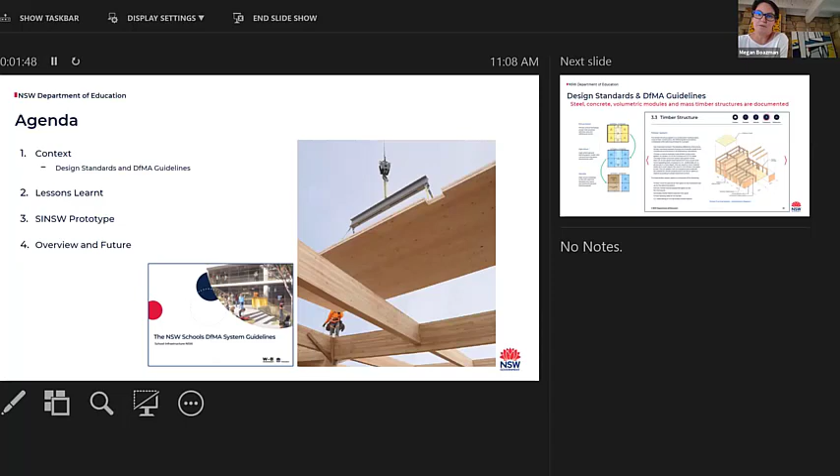And Ian Lomas from Woods Bagot will talk through in more detail about what these guidelines actually have in them. And this morning we'll talk about some of our lessons learned through that process. And Adam will also talk you through the school infrastructure prototype that we're going to be doing this first half of the year, and also give you a bit of an overview of what we think the future looks like for timber, particularly in DfMA.

So within the guidelines, we have actually, as I said, talked about these design standards, and we took the approach that this can work for steel, concrete, volumetric modules or timber structures. It's not actually precluded to any one particular construction methodology. The importance for us was to ensure that we had schools designed so that they could be interchangeable between primary schools and high schools as enrolment waxes and wanes, which is typically what happens over the 60-year lifespan of a school or longer.

So the guidelines are there to actually explain how you can apply any sort of structural systems, but it was really important that we made sure that from a perspective of enabling the timber industry and mass timber, we had a structural grid of 9 by 7.5, which suited all structural systems, but particularly works well for timber as well. So in terms of working out whether it's primary and secondary beams, we've had floor-to-floor heights and all our analysis done by TTW, which did a really good job on this. And there's a lot of detail in this document that actually shows how you apply this.

The intention and purpose is that we have an open source of procurement to some extent, so that it's a benchmark for all designers, architects, engineers, and everyone in the industry to be able to understand how we're thinking about the ability to put schools together for students, and therefore everyone understands the knowledge that goes into it and can apply it quite readily.

Some of the key benefits, and I think you're probably all aware of this with timber buildings, but particularly for education, some of the benefits around health for students are that you get a lower resting heart rate. There's been a lot of research to indicate that the connection with nature, biophilic design, actually helps in terms of ADHD and other sort of behavioural issues.

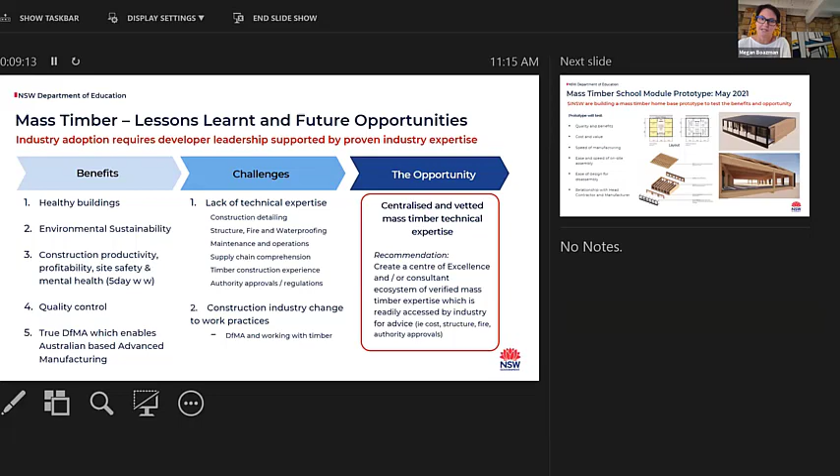I'll pass on now to Adam Taylor to talk about the prototype School Infrastructure is developing. Yeah, thanks, Megan. As noted, Adam Taylor is my name. I'm Director of the DfMA program within School Infrastructure. So Meg touched on some of the benefits there.

So within School Infrastructure in New South Wales, we've got a bit of a challenge ahead of us in providing infrastructure for very much an enrolment boom within public education. As Megan mentioned, we developed the DfMA guidelines and circulated them to industry late last year in December. I'm sure there's an opportunity that we can share that link via Andrew following this session. Ian from Woods Bagot is going to talk through them in a little bit more detail later.

But for us, the prototype really allows School Infrastructure to bring that guideline document to life. That guideline really starts to open the door for more efficient design and construction methodology, which obviously timber falls into that category. So Fern Bay, for those that don't know, is located up in the Newcastle area of New South Wales in Australia. It's a school that has that rapid growth and they're experiencing that at the moment.

What the timber prototype does is allow us to look at different ways we can meet the infrastructure needs of that school that would traditionally be met by our demountable program. So it's really something that we're quite interested in, as to how this could grow in the future and potentially be a wider program. At the moment we're currently working up the design stage. We're very close to releasing the tender for a head contractor.

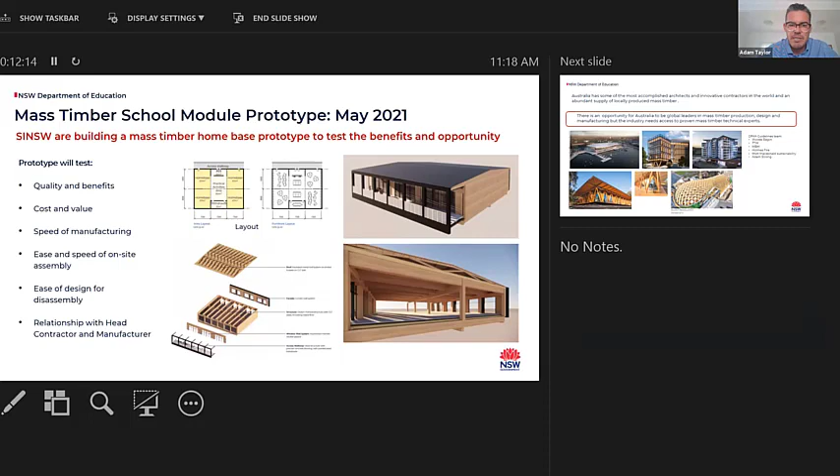Thanks, Adam. So really, overarchingly, there is a desire to see mass timber buildings become the norm, business as usual in Australia. There are so many benefits to it, and of course it plays into the initiative and strategic objectives around advanced manufacturing, particularly in Australia. We have some very, very talented architects, probably the most talented architects in the world, and I can say that from having worked globally. And I think that we need to support that a lot more.

And we have an abundant supply of local mass timber product, which we should be using rather than importing it. So from our perspective, we see it as an opportunity for Australia to become truly a global leader in applying mass timber, be it in hybrid structures or as pure timber buildings, particularly in New South Wales. The whole mass timber production, design and manufacturing needs to be invested in and supported. And we think there's a real opportunity, ironically, in this COVID environment to do that.

But the industry needs to be able to access proven technical mass timber experience and expertise. And that's where I see the opportunity being, as to how we might actually enable that to happen more broadly, for everyone to get access to that advice and that expertise. The DfMA guidelines that were put together with School Infrastructure had a really good team.

As I said, we had to swap that through halfway, two-thirds of the way through it, but we had Woods Bagot on architecture, TTW on structure, MBM doing all our cost planning, Holmes Fire, we had James O'Neill advising us on that, we had Mott MacDonald advising us on sustainability, and we had Adam Strong bringing his mass timber manufacturing experience and more of a builder's perspective to it.

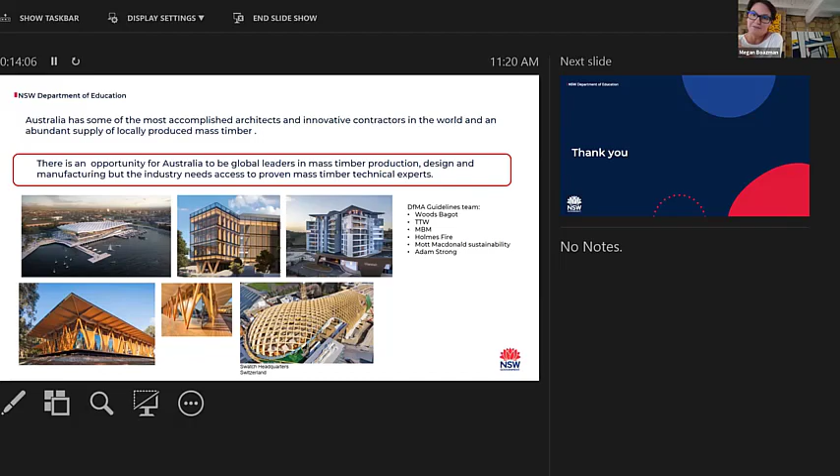And I want to reiterate Megan's discussion there about the team and the ability for us to challenge each other, and also to rethink the way that we look at and procure and design buildings. So what I'm planning to do is to use the DfMA guidelines as a basis for the talk today. It's all going to be out of sequence because it's an interactive PDF, but talk you through some of the principles, some of the challenges we've been looking at, and some of the opportunities.

So when we look at the DfMA in the schools, we found it was very important to set out what our principles are so that we don't end up going down a rabbit hole. Now, these are schools, so pedagogy is always first and foremost, and that has to be the basis of everything we do. And by looking at what is the best teaching outcome now and in the future, we can also look at equity across the schools with consistency.

Now, there's a resistance that says if you do consistent, it's all going to look the same, it's all going to be reductive and boring. I think we have to look at it another way, in the way that we can deliver the same level of quality of space and environment across the state of New South Wales. And within there, looking at how we can prioritize resilience and wellness.

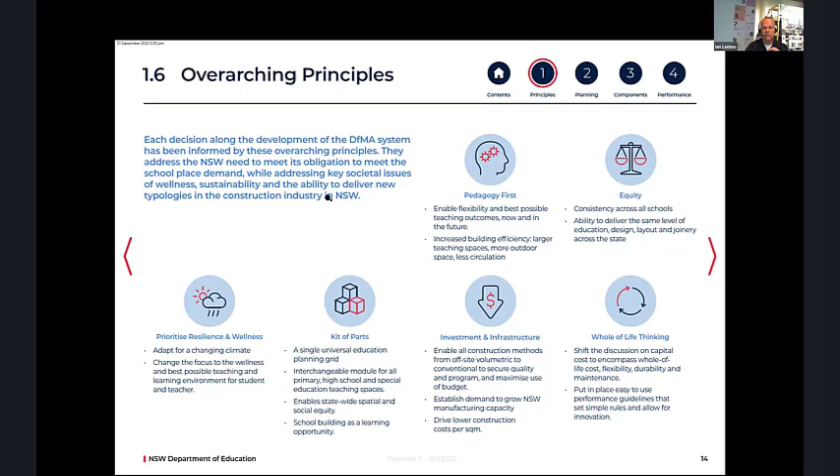Just a minute, I'm having the problems now.

Kit of parts or volumetric, we do not discriminate against different systems. And when we were looking at DfMA, one of the things which probably posed the biggest challenge, but also the biggest benefit, was how can we eliminate wet trades from site and make something that is truly modular and can be easily dismounted and reassembled without being destructive.

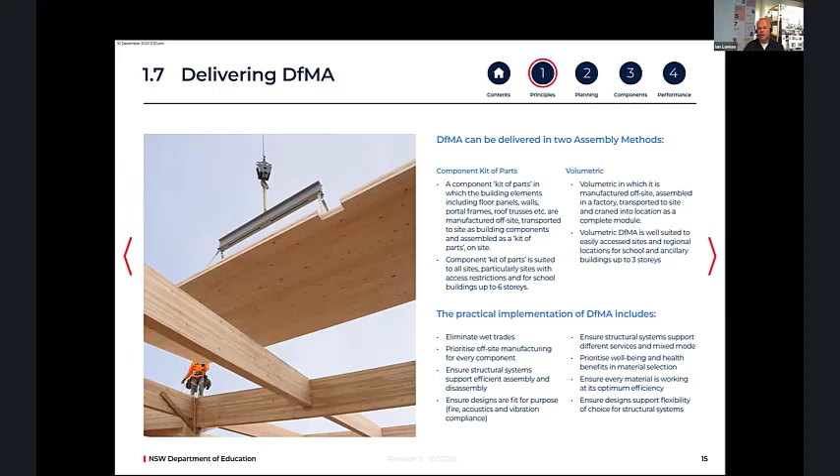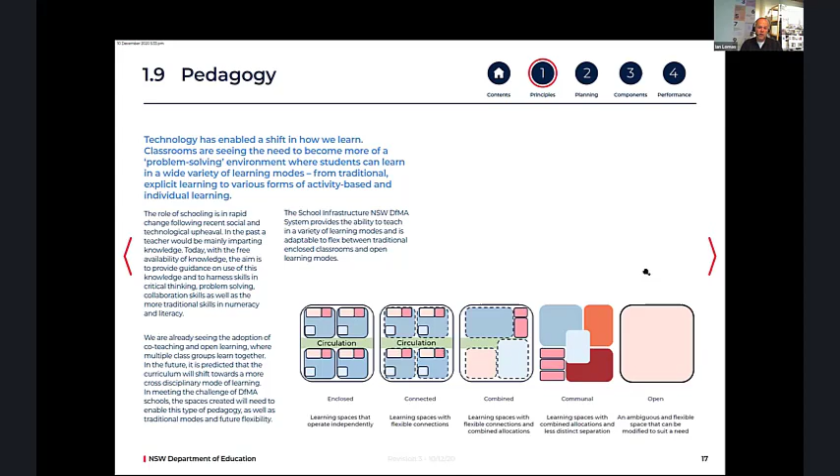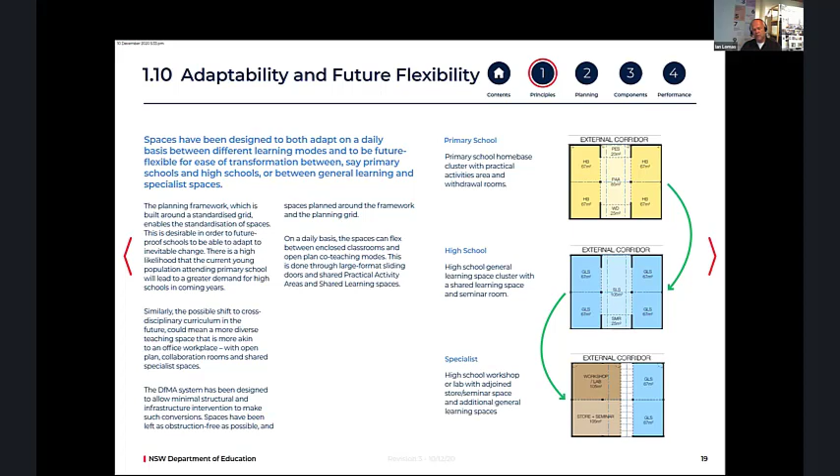Pedagogy changes all the time and will keep on changing, and it's never just one model. So how can we produce something that can evolve? And that means maybe looking differently at the way we design classrooms. Even within a school, changing demographics, you might start by designing a primary school, it might become a high school, or it might become a specialist space. Too often we're building buildings that can't be updated, and then they're just left or they're demolished, which also speaks to the waste of materials, the time, and the money.

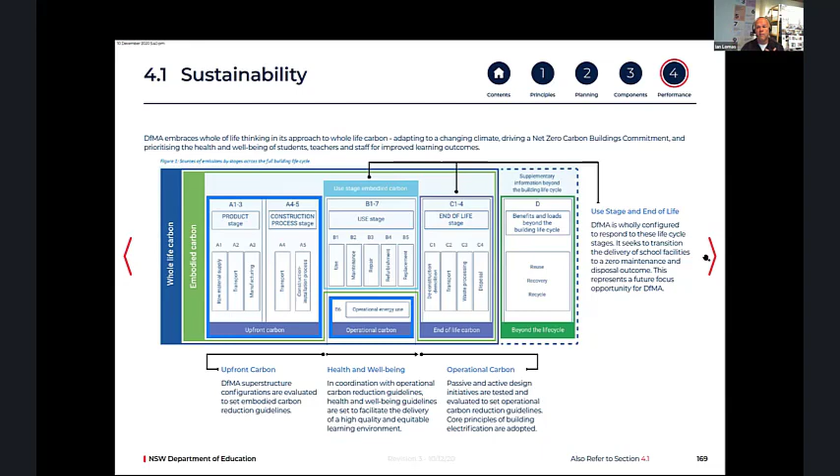And on sustainability, this is something working with Mott MacDonald that we were able to analyze critically: upfront carbon, health and well-being, operational carbon, use stage and end of life, all of these together. Very often, as we all know, projects are looked at the front end, or what you get at the beginning. But with schools, we're able to take a much longer view over the whole life and multi-generational qualities of the building and where the real benefits lie.

And looking at different structural systems, it's very simplistic to go, timber is all good, and timber, we all love it. But there will be hybrids. There will be different settings where, due to the local workforce, due to the local settings, other materials or hybrids would come forward. But we've always got to be able to analyze this.

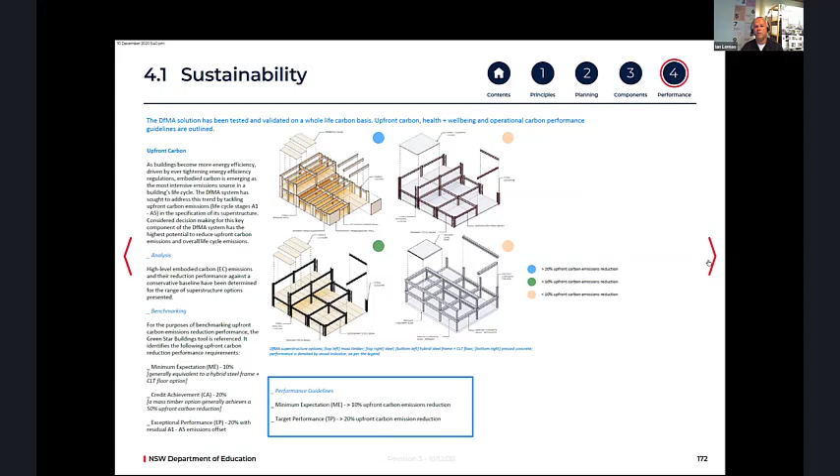On the upfront carbon, timber wins instantly, but we need to be able to grow a timber industry here rather than having to import it from the other side of the world. And climate resilience: we looked at every single climatic condition in New South Wales. We looked at daylight access, visual comfort, thermal comfort, views, interrogating all of the grids, all of the layouts, all of the facade zones to come up with an approach, a guideline of how this can be looked at.

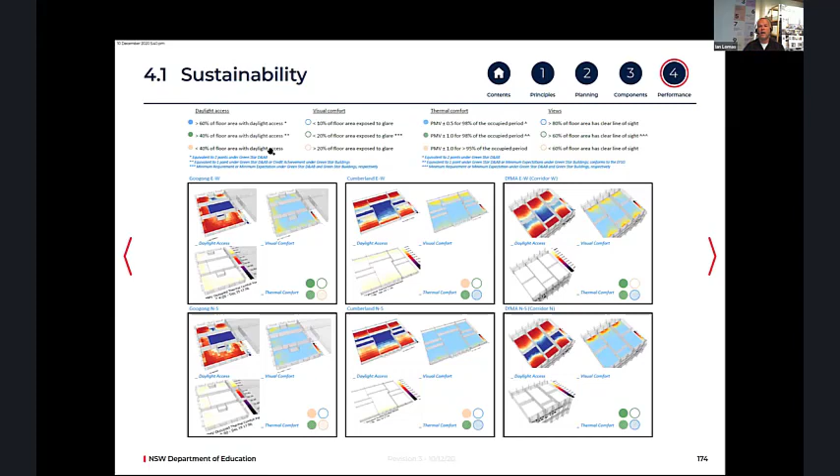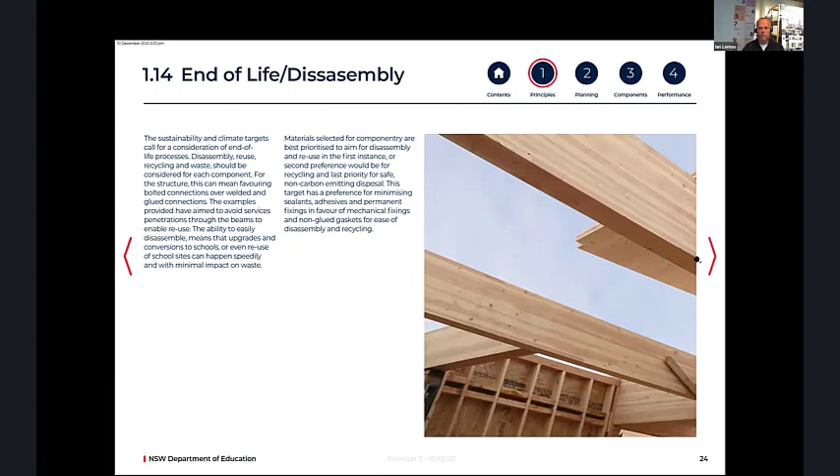And then at the end of its life, how it can be disassembled, reassembled and reused, again using the same components. So what are those components? They are the core here, and I'm using timber as our core base structure. Right in the middle, timber structure. Then we feed in there our partitions, our internals, which define the spaces, define the uses, and these can be taken out and moved so they do not prescribe the structure.

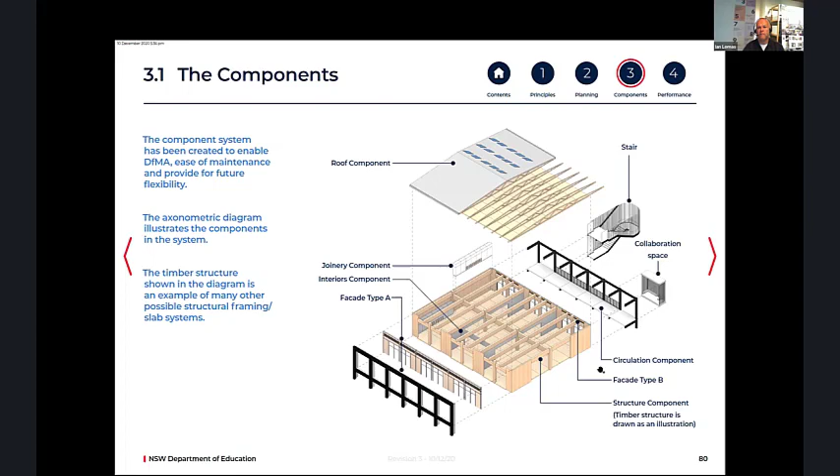Outside, we have facades maximizing daylight, maximizing views out, and the facades will obviously vary according to orientation, location, context. The roof, often overlooked, is also a key element. Are we going to build up? Are we going to use it for energy generation? And then the circulation, which comes on one side: collaboration areas, gardens, stairs, lifts, all of that plugs in together.

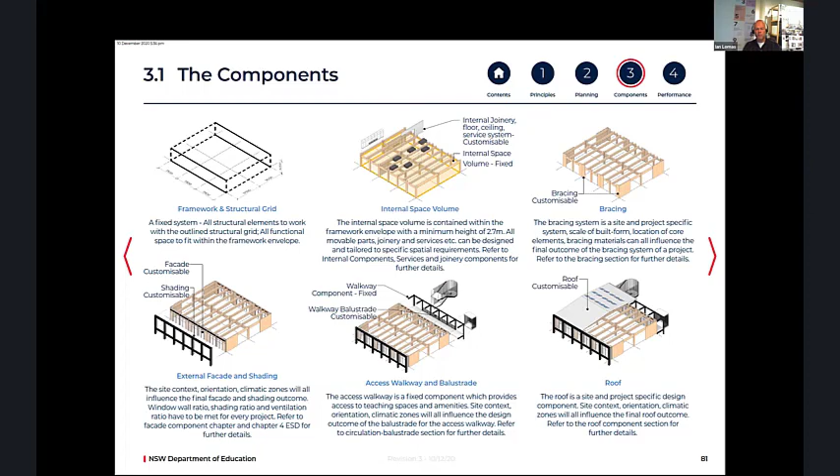So I'm just going to take you quickly through the thinking here. Framework. What is that structural grid? What is the internal spacing? How do we brace? What's the facade? How do we plug in? And what happens on the roof? Now, our framework, we had a lot of modules here. So we almost see this like a 9-meter train track. This can be one 9-meter or it could be two. The two allows larger classrooms. A single one allows it to be fitted in.

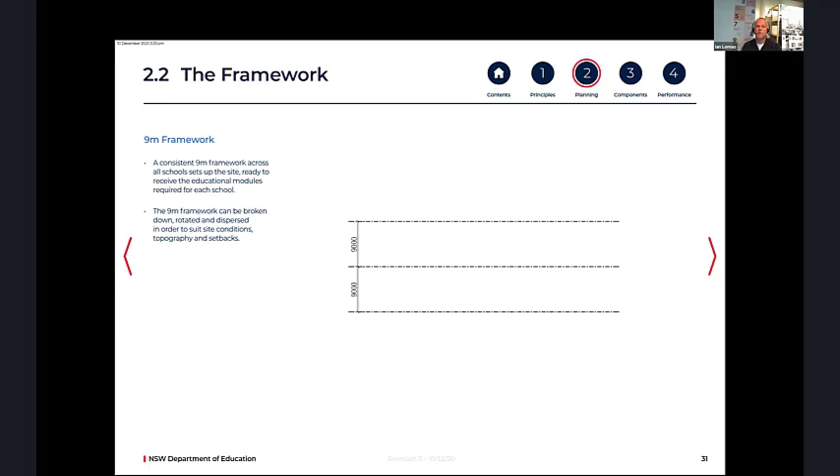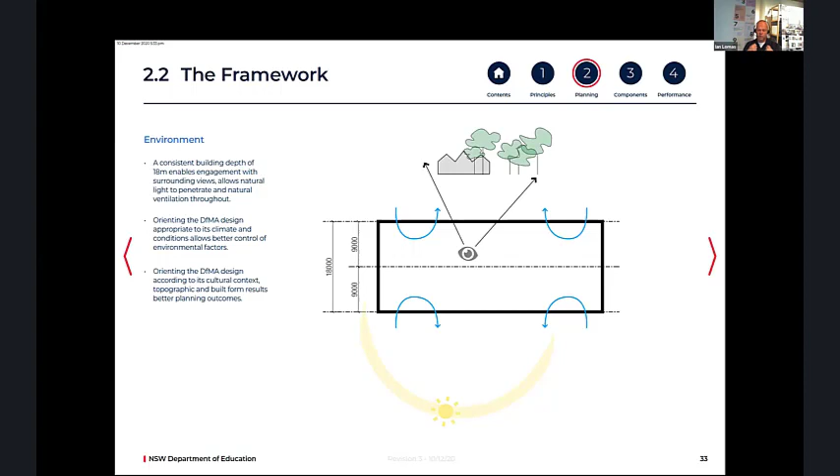Then we look at the facade, and we're really creating our chassis, our envelope that can then take all types of classrooms. We've got to look at the context, the orientation, where the sun is coming from, where the wind is. Too many school projects, or all projects to be honest, we design in isolation and then just put them around the site. This is trying to put forward strategies that look at the site first and create the best internal environment.

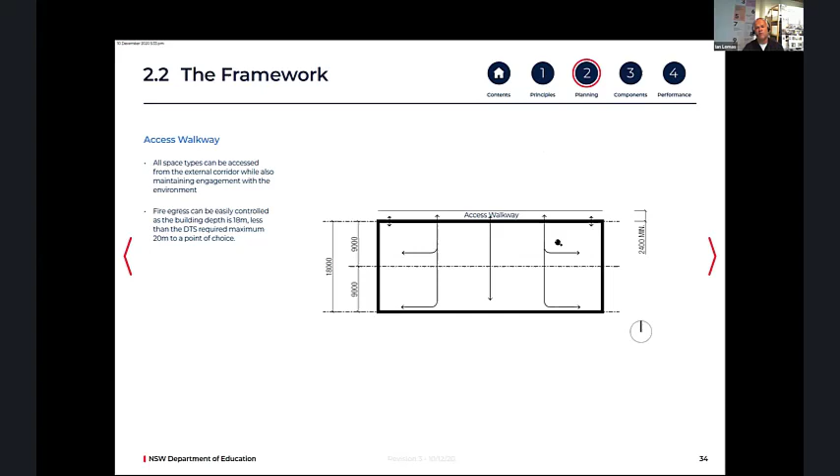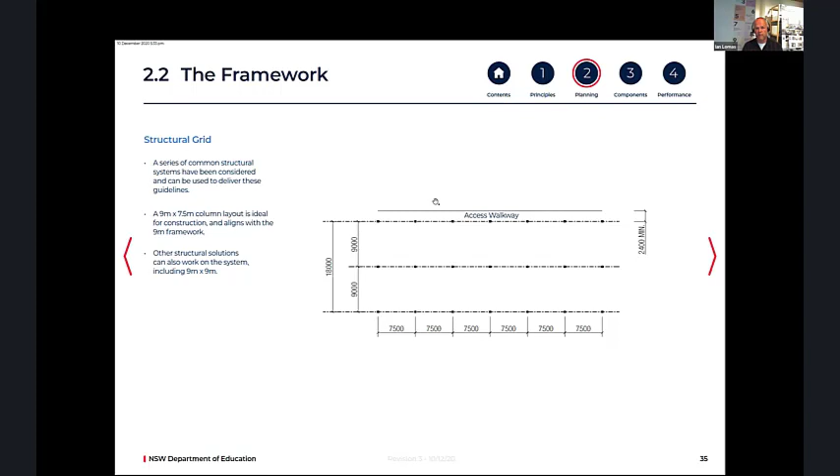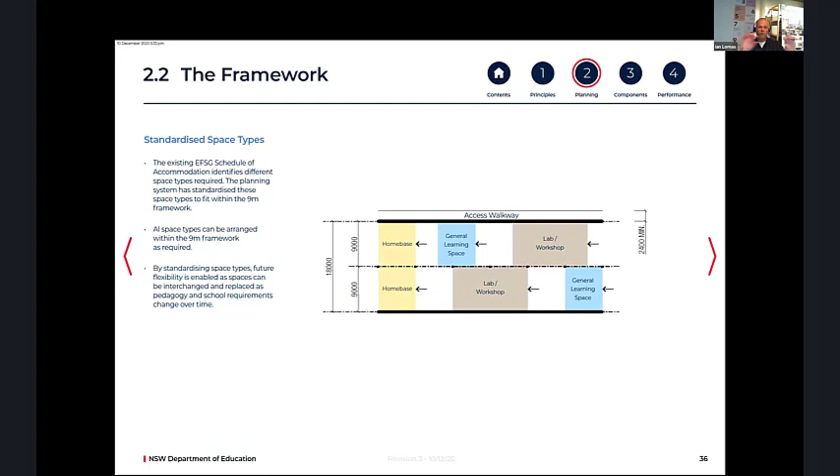Always looking at access walkways to one side feeding into classrooms, which then allow the classrooms to be opened up and configured in multiple ways. Looking at a structural grid of 9 by 7.5, there are, of course, options. We looked at all classroom types. So often we just look at a home base or a GLS or a lab. This looks at all of those uses in all their configurations and what would work best for them. So along this 9-meter rail, you can put home bases, general learning spaces, labs, workshops. They can all feed along there and find their location in the school plan.

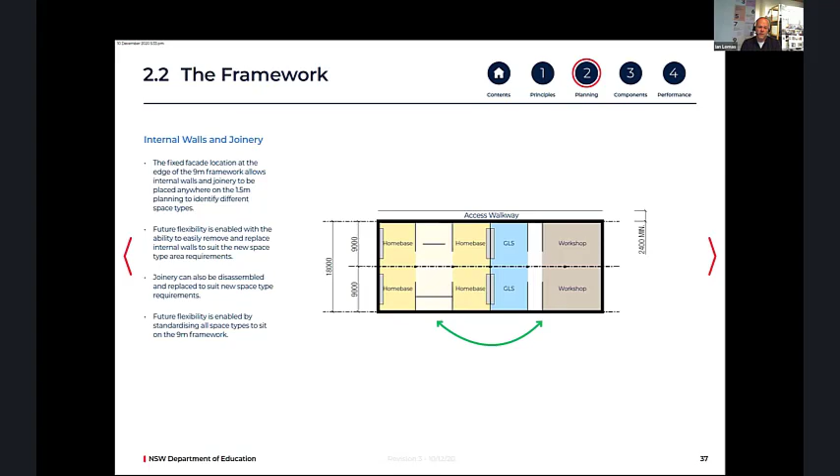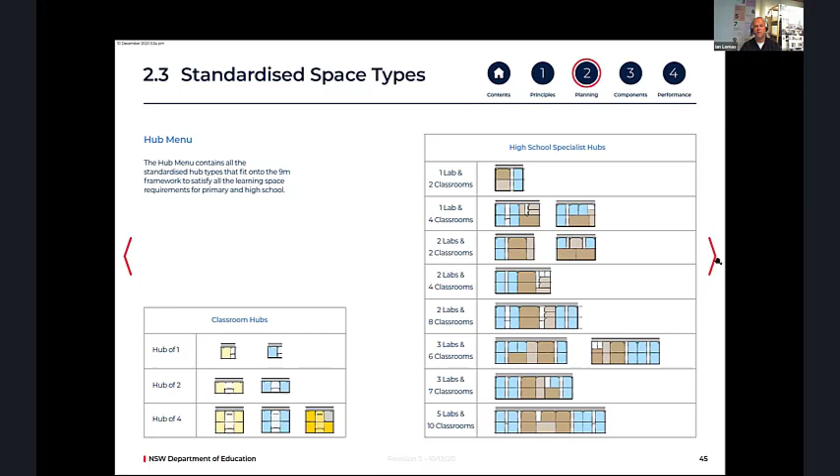And then within there, you insert your joinery items, your walls. All of the walls are joinery. All of the glazed screens are joinery. So everything can be made off-site. Nothing is permanent, and it can be disassembled and moved to another school or a different group. And these are some of the hubs and the different layouts that we're looking at. There are certain relationships of labs and classrooms and prep areas, or different classroom hubs. This is just a snapshot of about 20 pages.

Internal layouts. What can we do to actually remove finishes? This means we have to look at the floor not being a wet floor, but a raised floor where we can bring services and change floor finishes. The joinery items: we can feed all of the services into those joinery items to make them really working and drop them into the site.

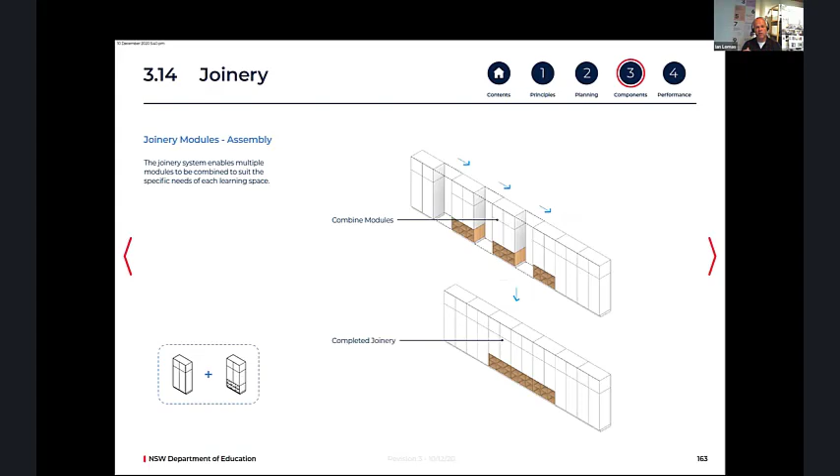And by looking at a regular module, which will run throughout all schools across the state, it's then easy to upgrade and vary as you go. Then you just order them, slide them together. And if things need to change, you change the internals of the carcass the same way you would a kitchen or wardrobe unit. When we were looking at structure, these are some of the criteria. Barry will be talking in more detail, but we're looking at everything from the regulatory and the carbon to where it comes from. And of course, what it looks like. This is a slide we first produced, which is why we have the aesthetic right up front.

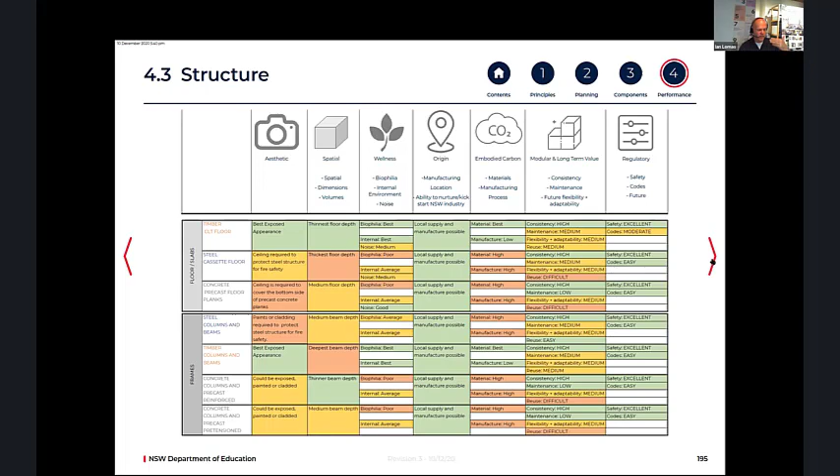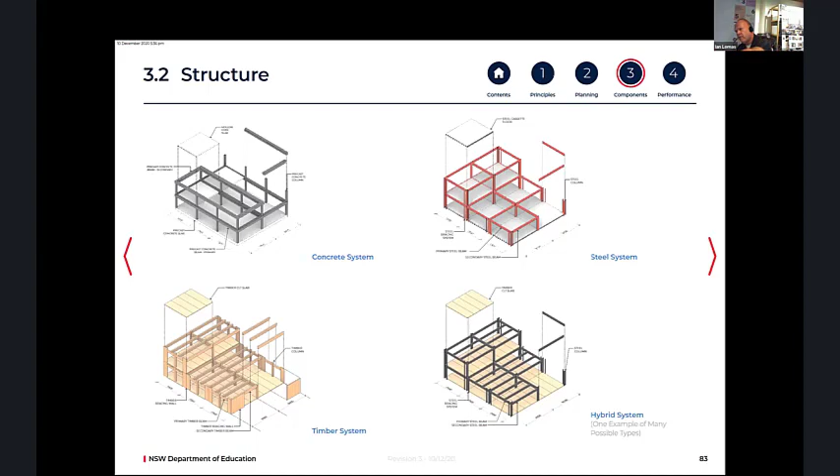I often think that the 5th sustainability pillar is, of course, beauty, because if it's beautiful, it's also going to stay longer. And then when we look at all of these systems, what do they mean to the space? What do they mean to the future flexibility? Because we've always got to think ahead 10, 20, 50 years as to how these buildings can be reused.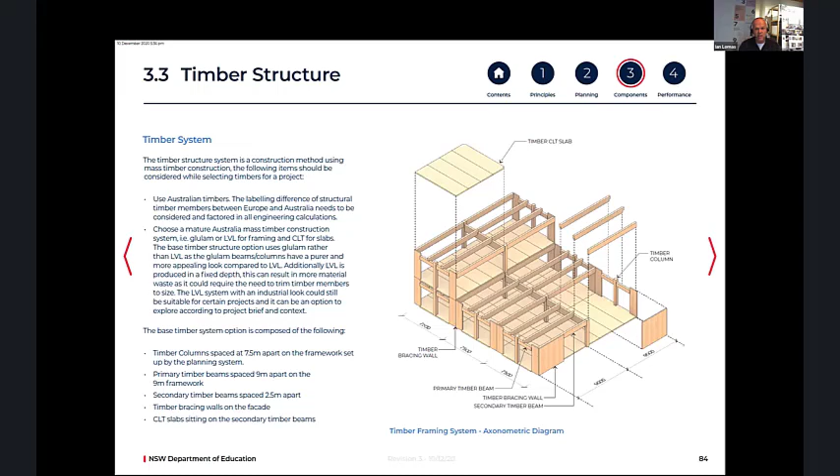Now, looking at the timber, we want to expose the timber. We want to show it off. It's a teaching tool. It's also a well-being tool, as Megan talked about, that whole sensory engagement with the timber. And how do we feed services through here so that it can be done orderly, it can be easily serviced, and it can be updated as we require?

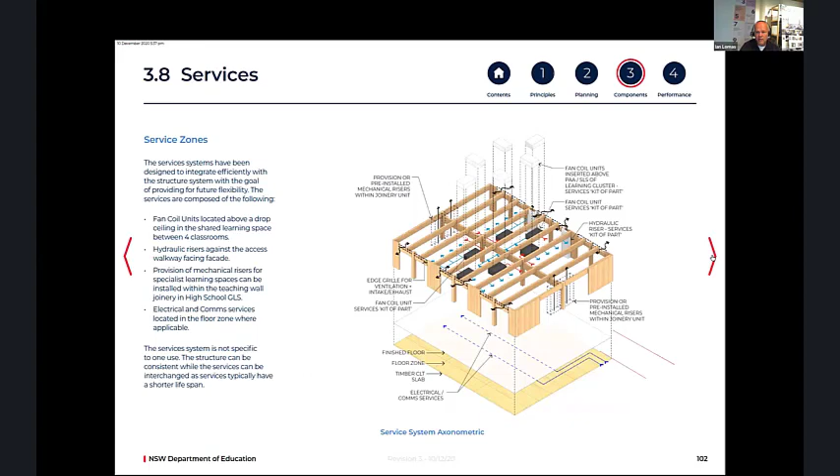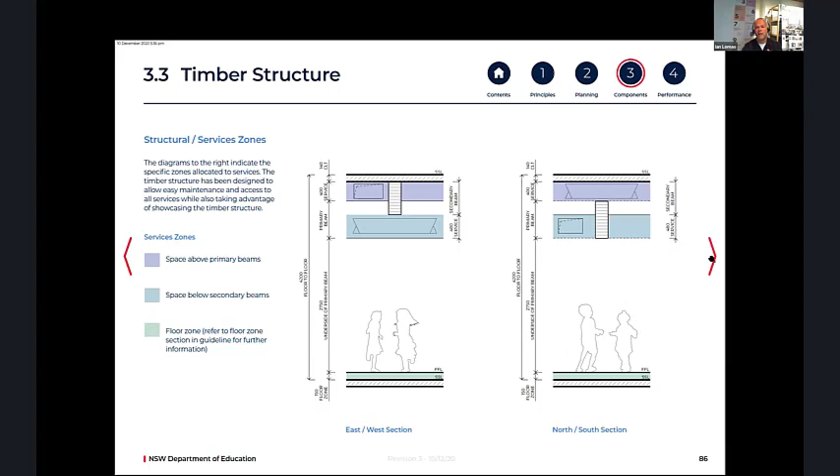Now, here is a section through the structure. I don't know if you can see there's a primary beam, and then the secondary beams, and then the primary will create these secondary service zones across the top, which allow us to thread services through. And by having a floor zone, it allows us to run drainage, it allows us to deal with acoustics, different finishes on there, all within the same height. And that was something which really liberated us and allowed us to create DfMA buildings that were really DfMA.

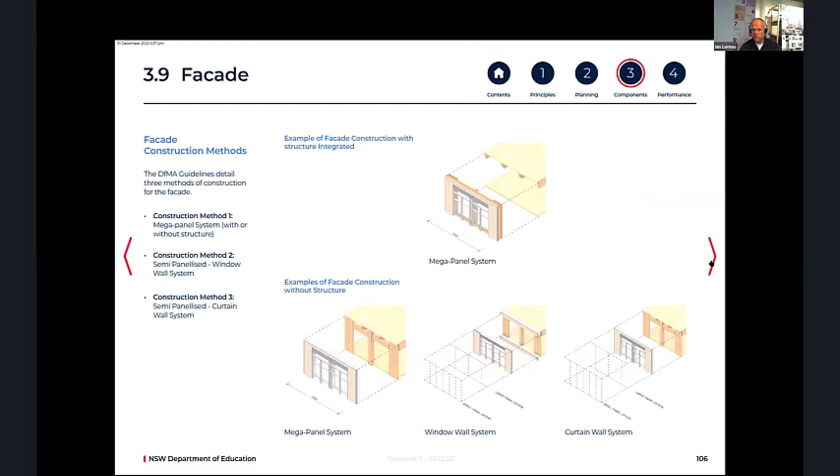Looking at different facade construction methodologies, again, it doesn't all have to be the same. And this is looking to that corridor side where you could start to plug in different elements to create a school language that was bespoke to your school. And whether that's the walkways, the bridges, the lifts, the planting areas, all of these are in pre-described modules.

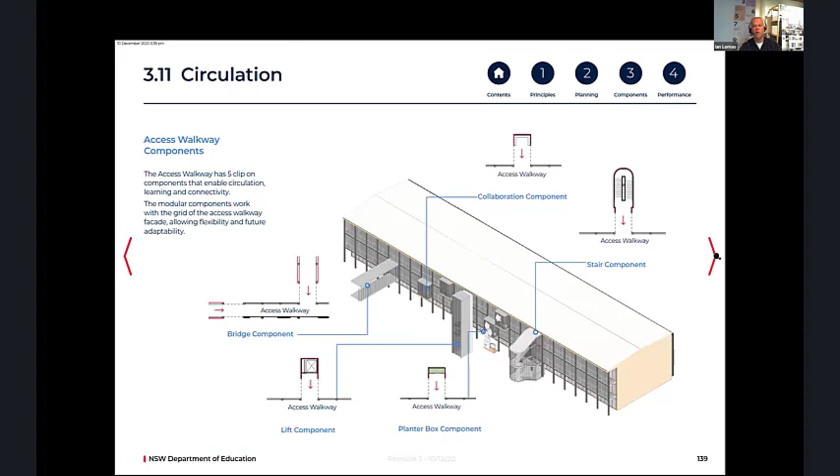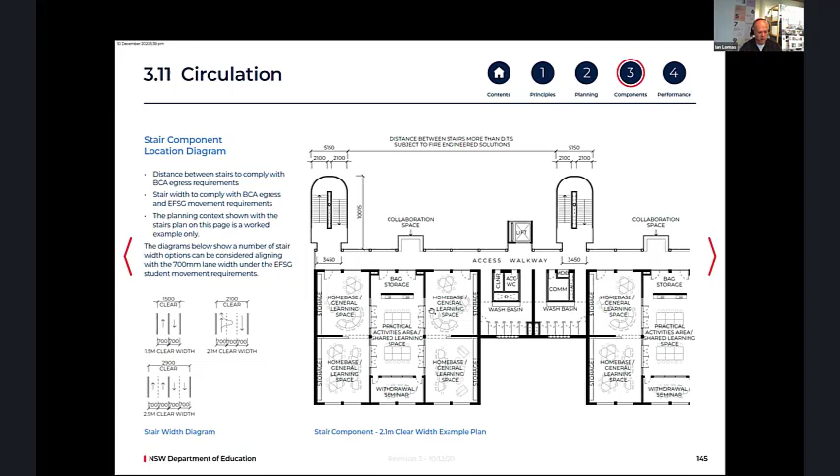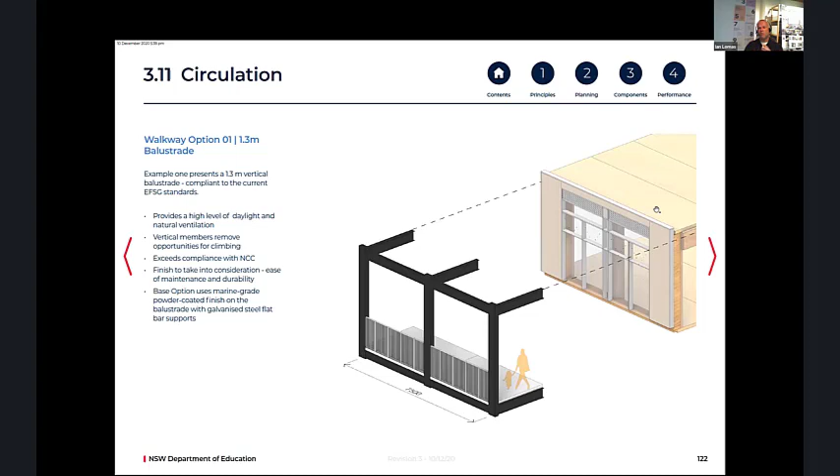Facade options, again, this is where we can start to plug in. If you have your timber chassis, your main teaching spaces, that doesn't mean that the walkways have to be timber. There's a question raised here about the use in fire and maintenance and external. In this base case, we are looking at other materials for the external timber as well as timber. This shows steel, which can be used to form the walkways.

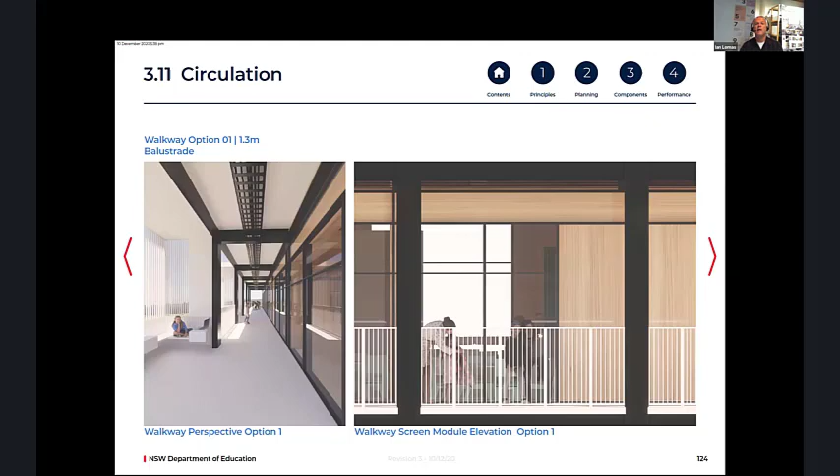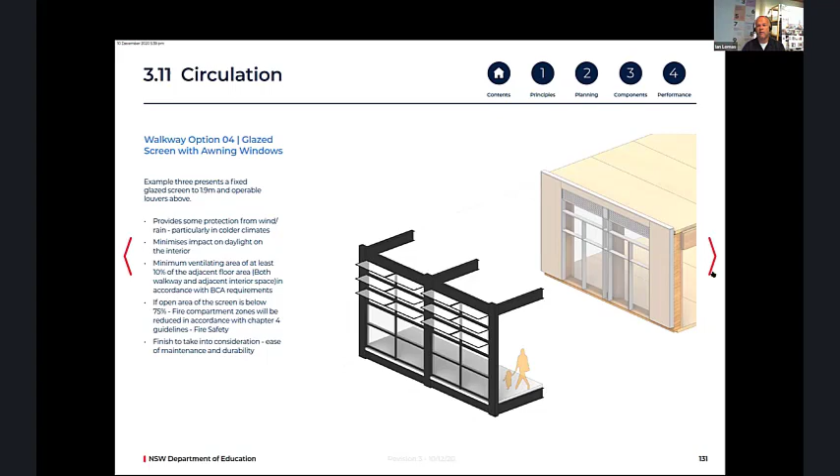We can also create glazing so that we've got, say, a north-facing glazed corridor, which can be used during the winter months in our colder areas to be added in so you can ventilate. You've always got to look at ventilation, at prevailing winds, at the internal temperature.

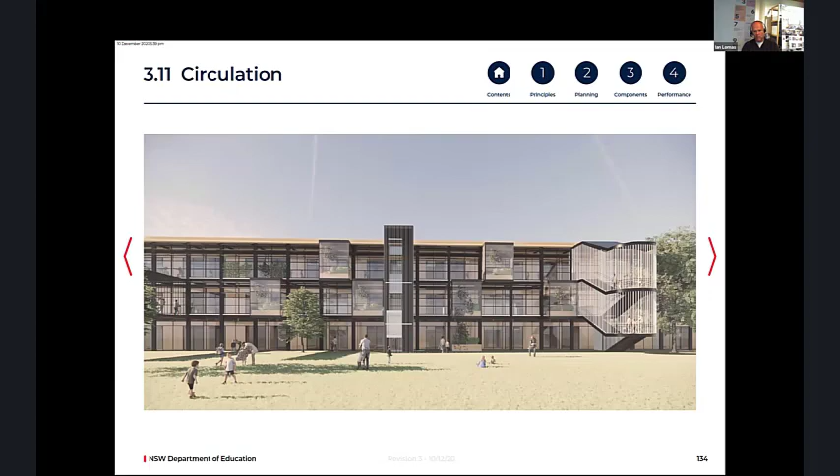And these are the type of schools that we will be creating, schools which are based around the student and the pedagogy first, the internal environments, the long-term sustainability of the structures, as in relevance to pedagogy, in energy used, long-term viability, and also being able to easily upgrade across the state and within the building so that the buildings remain relevant and in place for many generations.

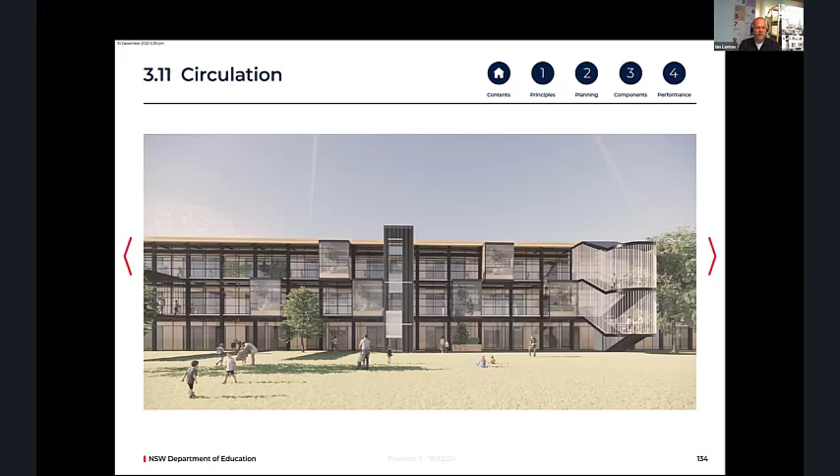Hi, my name is Barry Young, Director of TTW. I'll give you a quick overview today on probably more the end result, which is the timber building, but also the journey we went there to come up with a standardized design, which allowed us to come up with this kit of parts approach.

Just bear with me. Okay.

So the key design items were here. Number one, standardization of design. Now, to do that, it was really setting up the loading criteria, and I'll go through the loading criteria in a second, but we really had to make sure that we change the layout so all the 3 kPa areas were really put on the upper floors, because there had to be flexibility here that, in 5 years' time, we could change the classrooms around totally. The usages could change. The second criteria, yes, it had to be designed for manufacturing and assembly. 3, local procurement, Australian procurement, New South Wales even better.

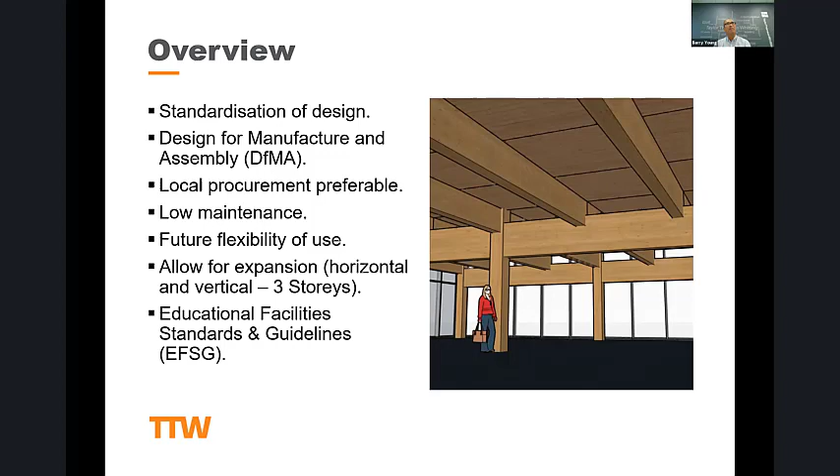Future flexibility was the key. That future flexibility will be dictated in the early phases, so you may not have to design for it. But when we did that, we allowed for expansion both horizontally and vertically. And also there are some standard Educational Facilities Standards and Guidelines that have been around for a long time. They are going to be reviewed at some point in time. I can go through those items in a second.

So starting with loading, we discussed it, and I think it was agreed that the upper floors will always be a 3 kPa scenario. So all the heavier loads, gymnasiums, libraries, workshops, woodworking, metalwork, kitchens, will go down onto the ground floors if they had to be down there. And therefore the ground floor itself, again, could be timber, but the base case was a concrete slab on ground. But that would be a case-by-case basis, especially depending on the lay of the land.

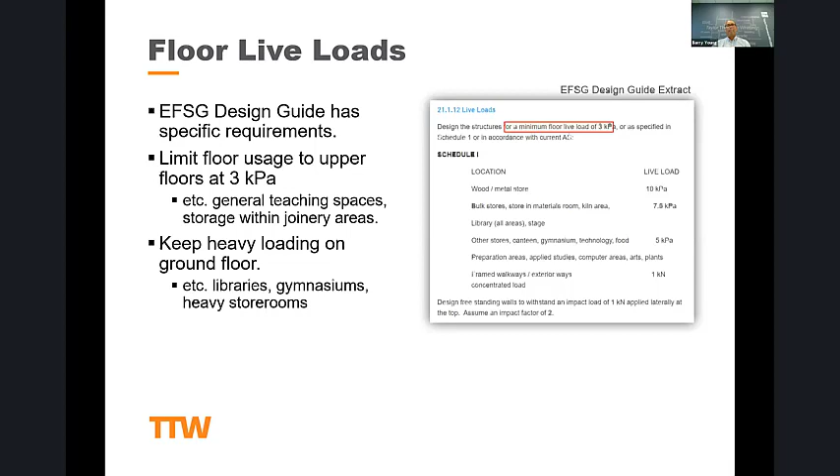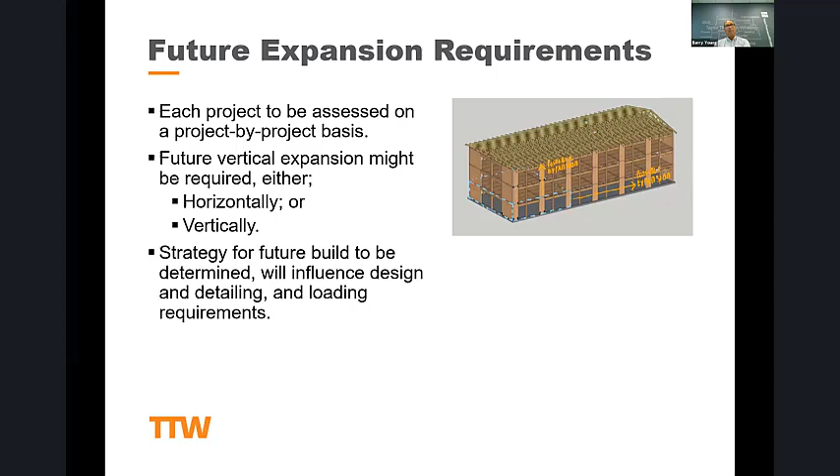Future expansion requirements. This will be assessed from day one when you start your individual project, whether you need to go upwards or horizontally. And for that reason, we've designed the structures so, as Ian showed before, they can be plugged on horizontally, which will work with the bracing of the building, or plugged on vertically.

The horizontal plugins, as you can see with the classrooms there, the 7.5 modules, 3 bays, but we negotiated shear walls that could stay there permanently, so you didn't have to modify the lateral stability of the building. And these layouts would have worked with the ground floor ones, which were the heaviest ones, which could have been workshops, laboratories, science labs, etc.

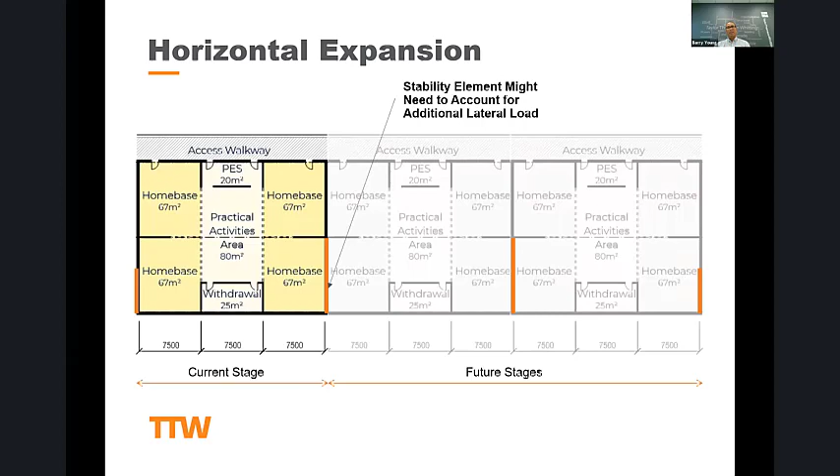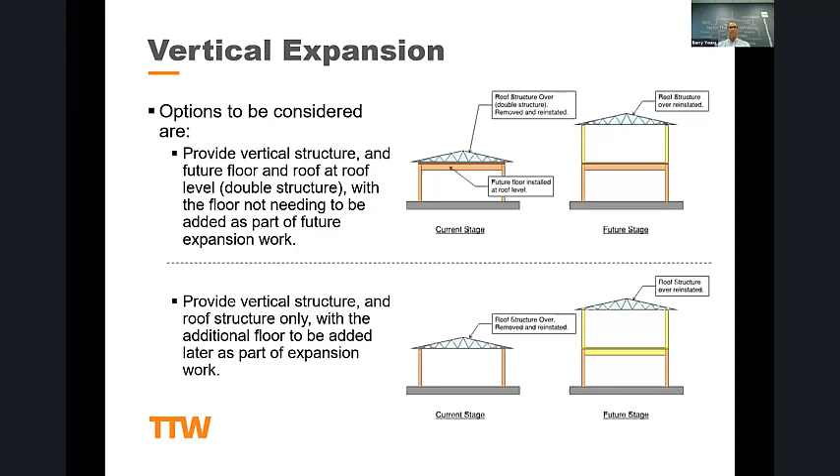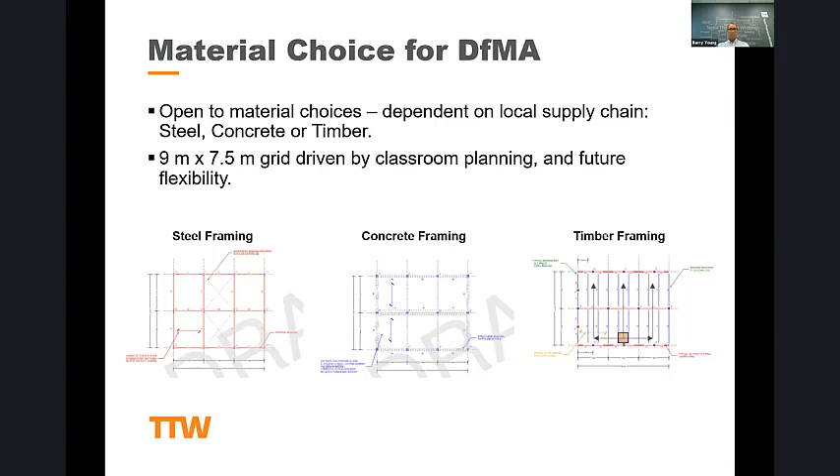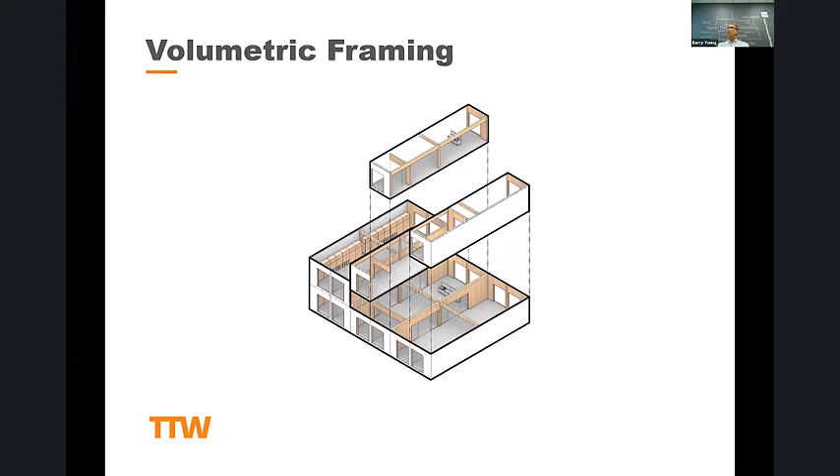The options we looked at were steel and lightweight floors, steel and concrete floors, precast concrete beams and columns with precast concrete floors, again to test the heights, and then volumetric. We didn't spend that much time on volumetric because individual suppliers were already developing those in quite a lot of detail. With the timber framing systems, Ian showed you the final outcome, which indicated the 4.2 floor to floor.

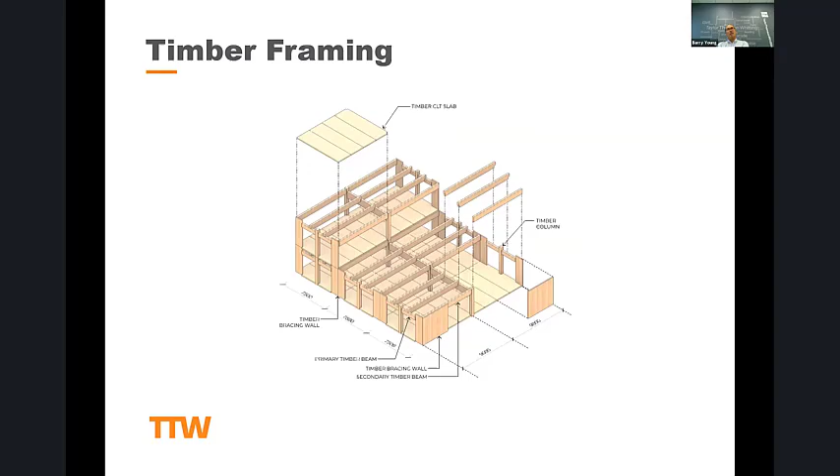With the system itself, we firstly looked at material selection, the use of CLT versus glulam versus LVL. They're all interchangeable. We didn't have any preference as to which material was used where. I think the key was the same: try to expose as much of it as possible.

So when we looked at the options, we actually priced the options too. We looked at different grades of glulam beams, from your GL11s up to your GL18s. We were actually getting some very competitive prices on the GL18s compared to the GL13s. So to be on the conservative side, we went to the softer wood, the GL13, which is a readily available grade, and we based our sizes on that.

The CLT grade, we based it on the XLam XGP1 and XGP2. There are other suppliers of CLT coming into Australia. They're really in their infancy, but they are becoming available.

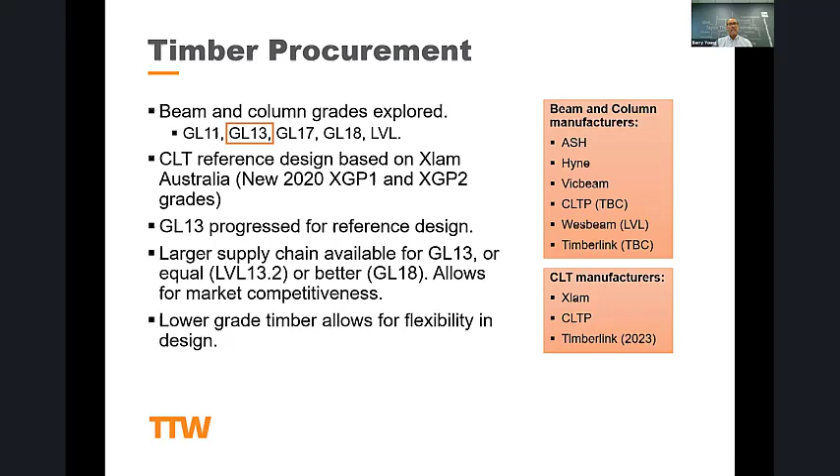And then with the timber framing options studied, we looked at the traditional options of firstly the in plane, where the primaries and secondaries were in the same plane. Service reticulation required notches in the primaries and secondaries or penetrations through the actual beams. The issues with that was future flexibility, and the approaches were that mechanical systems would vary between whether it was a classroom, 4-cluster classroom, versus a workshop versus a science lab. Science lab being probably one of the most demanding there for mechanical and floor services. So it was also drainage from above that had to be considered.

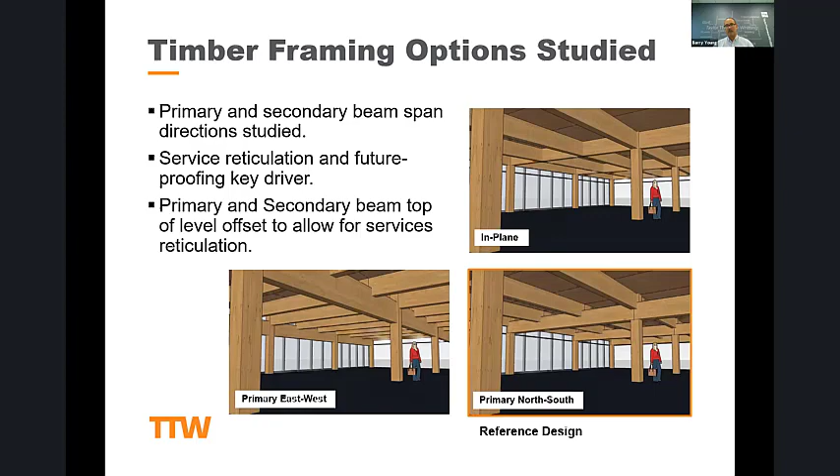In the bottom left hand corner there, we looked at primaries in the east and west with the secondaries on top. And then we ended up with the primaries going north-south and the secondaries sitting on top there. Now, the benefit of this system here, again, it was the layouts of the 4-cluster classroom. It worked really well with the current mechanical layouts. Again, if you were putting any wet areas upstairs, it allowed us to bring plumbing through and reticulate it back down to the risers. And this system here allowed for a 400 zone between the primary and the underside of the CLT, so ample room to get ducting and services through.

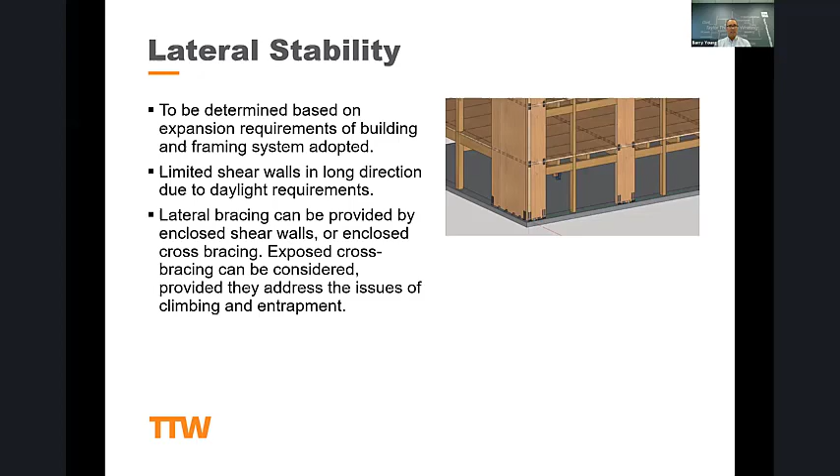Lateral stability. We worked very closely with Ian Lomas on the facade of the building and what is the lateral stability of the building. Now, with the lateral stability, we did investigate vertical bracing, but from a WH&S approach it was deemed that it wasn't safe, for children climbing the bracing, or even getting caught underneath the corners of the bracing there. So any bracing needs to be concealed. So we negotiated with Ian these on the elevation.

So this is the front elevation and the rear elevation that faces the balconies, the corridors. So we've got up to 1.2 meters of zone per bay that we can put bracing in. So equivalent, basically 2.4 widths you can get. This can be repeated on every bay, or if you don't need it, you can minimize it. But also we had the challenges to meet the actual shading requirements, etc. That, you know, we couldn't have too much glazing anyway.

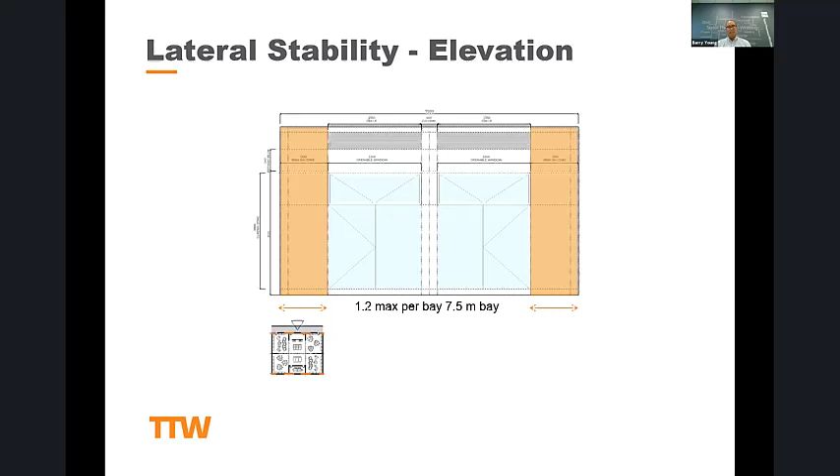Fire. The approach with the structural systems, steel and concrete. Concrete was obviously pretty much deemed to comply. Steel did need fire protection. That's for 2 and 3 storey buildings. With the timber, the compliant DTS is really covered up with plasterboard. The timber is actually protected. So it is a performance-based solution to expose the timber. And this is for 2 and 3 storey buildings, and sprinklered. So that's the approach that was taken here and signed off.

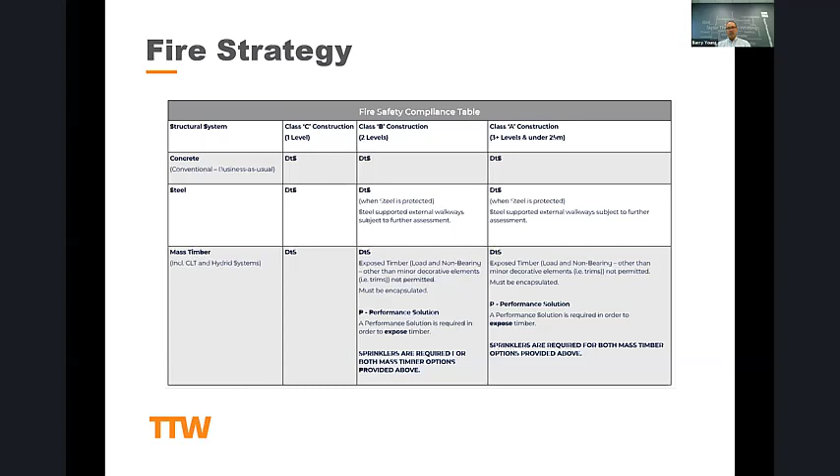And just finally, some of the keys again are probably more about where do we use timber? It's preferred that the timber is behind the cladding. They really have limited resources for maintenance. So coming back and applying finishes to exposed timbers, they really don't have the resources for that. Which then also, there's a lot of discussion on what do we do on the external corridors. If the corridors were going to be enclosed with glazing, depending on the climate controls required in the schools, timber could be considered. But if they're going to be exposed to the elements, the base design we were looking at was steel and concrete.

Moisture management plans were also in the actual guidelines; during construction, moisture management plans need to be put in place to make sure that timbers are protected. UV and sun protection and maintenance. We've also required that the timber have some type of light coating. It could be a lime wash, something like that, that could be matched. The issue we have with timbers is if you have to come back and sand them, graffiti, etc., it's very, very hard to color match them. So something there that'll allow you to do any minor maintenance and still have the consistent appearance of timber.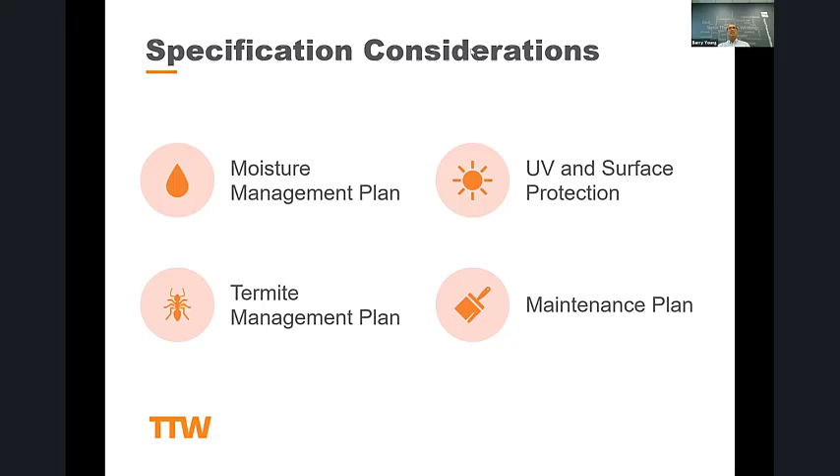Thank you, Barry. We'll just now introduce Richard. Richard, please take the screen. You look at the screen sharing there, Barry. And Rich will give a talk about the costings. Thank you, Richard. Okay, guys.

Thanks for having me. I'm Richard Smith. I'm a quantity surveyor. To give you a bit of context as to why I'm here, my background has involved a lot of prefabrication and a lot of timber construction, both in England and here in Australia, although I've been here 20 odd years.

So it just sort of illuminates the point I made later on that timber construction is not really new. Prefabrication is not really new. And we've been building in timber, of course, since the Neolithic period. So I think to sort of suggest that we're dealing with anything other than basic construction is a bit of an urban myth, right?

And I think because of my background, we, MBM, were engaged to provide the cost planning on the 5 modular schools that were part of School Infrastructure's journey through prefabrication that Richard Crookes and Hansen Yuncken built. Those schools are Jordan Springs, Alex Avenue, East Leppington, Wagga and Catherine Field. They've got more exotic names now, but those are the 5 schools that I worked on.

It's important to say that they were more closely aligned with volumetric modular type schools than the kit parts that some of the guys have mentioned so far. But nonetheless, they were absolute prefabrication, and these schools have been open now.

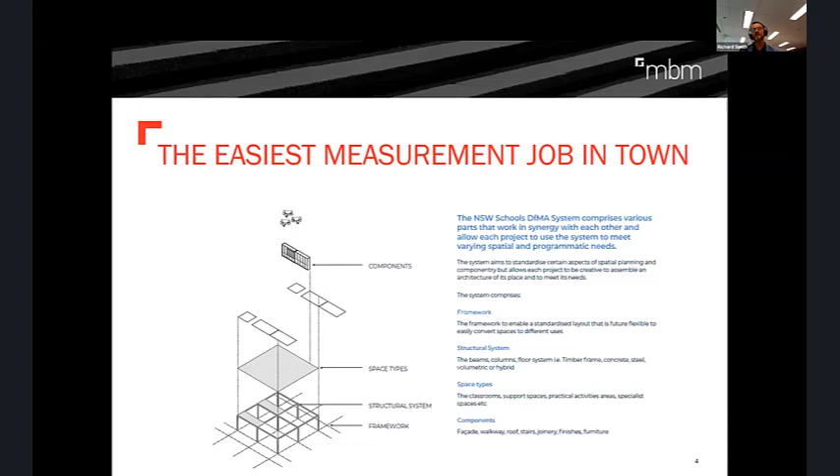I think it's important again to reiterate that this is really probably the easiest measurement job that you're ever going to go through as a quantity surveyor. You can see the simplistic nature of this stuff, and even the framework here. And there's a reason it looks like a children's toy set, because it really is that simple, and it requires that level of imagination to cost and put this stuff together.

So I think the urban myth that we're dealing with something that's new and unusual and uncommon is largely inflated, and I don't really buy it. We've been putting men on the moon for 50 years, so building a timber building to me doesn't seem like a giant leap for mankind really, or for the building industry, but it appears to be that way.

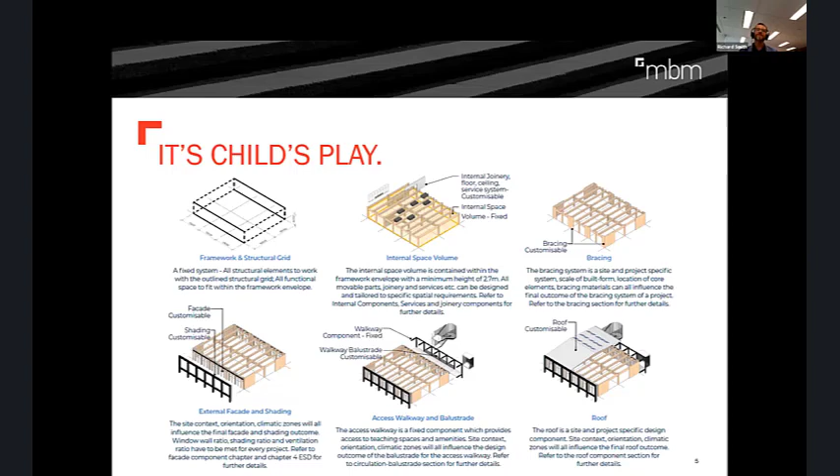As well, whilst we are on a timber solutions webinar here, I think it's important to say that not every element of the school is timber constructed. The concrete slabs are obviously built out of concrete, some of the internal fit out, some of the surfaces, some of the roof. It's not necessarily a fully timber building, and I think that's important to reiterate, just so there's no illusion that we are trying to push purely timber as a solution for schools. That's not what we're talking about here at all, actually.

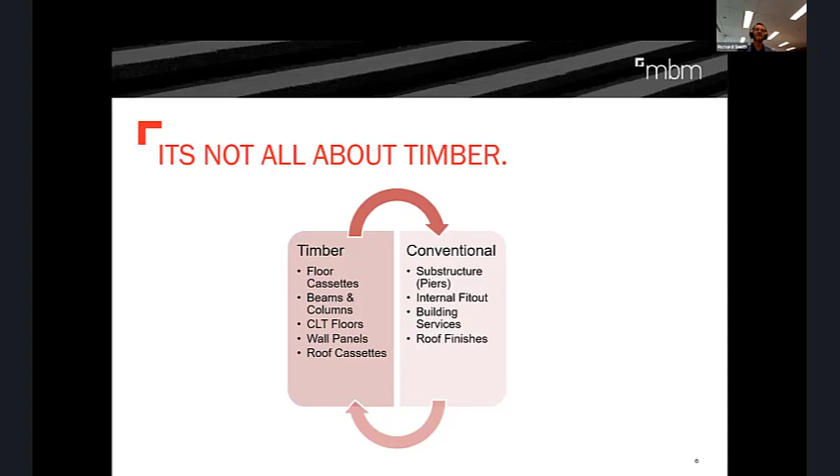I think it's important to say as well that there is a place for steel and concrete, and even the hybrid solutions, which I'm really interested in. We have to be wary of pushing one solution. As an industry especially, we need to become more flexible, more adaptive to different solutions. And as a quantity surveying industry as well, we need to be prepared to price different methodologies for school projects, and whatever works best should win out. There's no allegiance for timber, nor steel or concrete. Whatever works best on a particular site or a particular school should win out, right?

In terms of pricing these DfMA schools, we split it into a 3-stage process: from pricing the stuff that's coming out of the factory and the supply of that, the installation of that and the freight, and the internal and external fit outs that might take place on site or not.

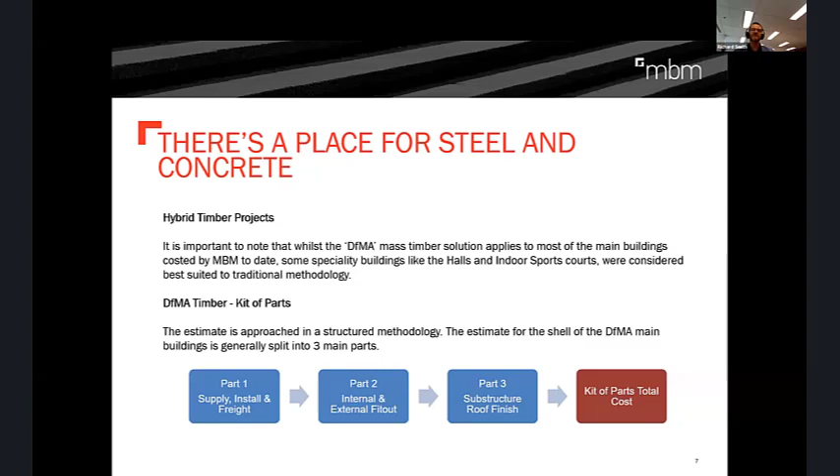That debate is still happening now. And then also some of the roof coverings and the roof plumbing, which may or may not again take place on site or off site. I think we've allowed flexibility in our costings to cover each of those eventualities, right? But eventually we're going to arrive at a kit of parts total cost.

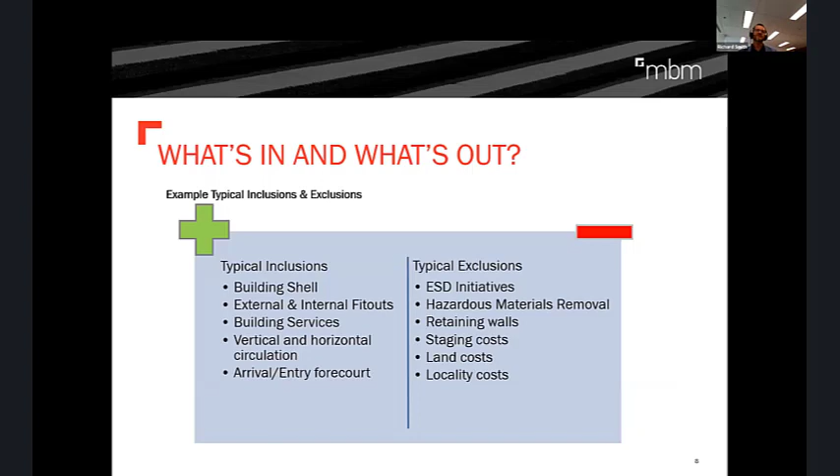In terms of what's in and what's out, you can see here that it's not any different from any typical QS cost plan. I mean, we're including everything essentially. Things like ESD, contamination, retaining walls, staging costs, land costs, locality costs, they're all specific to a particular project. So I think they'd be naturally removed from our costings. But that's just a typical clarification for you guys, just so you know what's in and what's out.

So here's the most important slide of all mine. Is it cheaper, right? And what we're putting our hand on our heart and saying is that it is. I think there's some caveats around that low pricing, but ultimately, I think the journey that we're on, and bear in mind we're right at the start of it at the minute, would deliver a cheaper build, right? And we think it's about 10% cheaper than traditional.

I'll talk more about what actually might happen in the upcoming tenders for DfMA, but generally speaking, we think, through all the methods of costing that we've undertaken, from the first principles costing, to the market feedback, to the engagement with new suppliers and fledgling school builders, we've aggregated all that, and we think that a 10% reduction in building cost is not just achievable, it should be an absolute given, right?

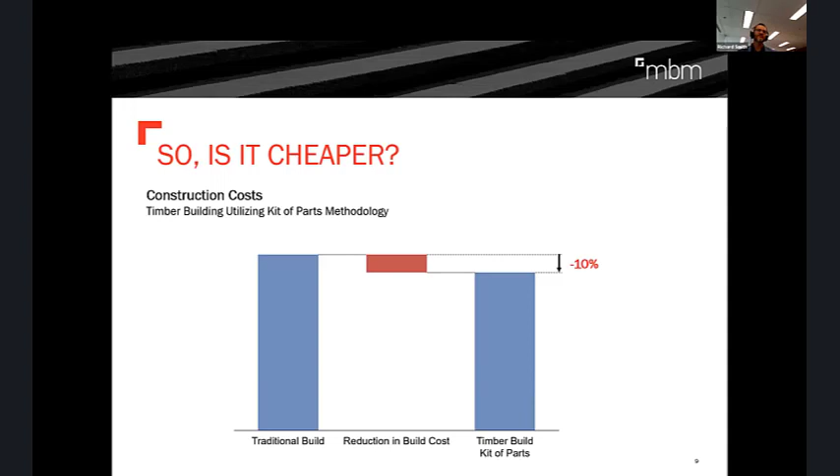Builders and consultants, look away now, only because part of the reason behind the DfMA or kit of parts construction is that it does produce a faster delivery. And the idea of having ministers being able to go on the news and guarantee schools will be open day one, term one, seems ludicrous, right? But I think this methodology does allow that more certain environment.

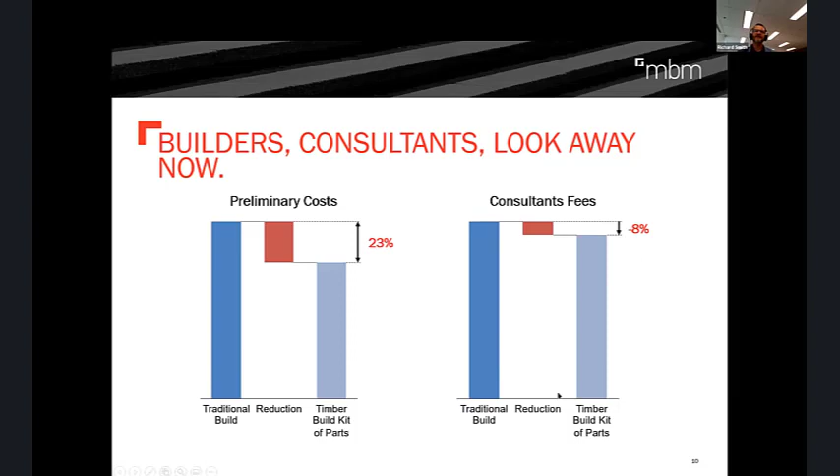And consultant fees, guys, don't anyone start throwing stones at me here. I think ultimately we're all going to have to learn to live with the fact that standardization and repetition will produce a lower consultant fee cost, but that's fine. I don't think there's any need to panic there. I think that's a natural course of events anyway.

So I've said observation and hope for the Luddites. That's deliberately inflammatory, only because I think our industry has done a terrible job of evolving. And I think part of this initiative by schools is hopefully going to change some of the reputation around our industry, which hasn't evolved at all, right?

I think the important thing to know, though, is that when we started out, there was very, very little benchmark data. I know Victoria's doing some things, albeit smaller schools. I know Queensland's done some, Europe and America have done some things, and all that is absolutely relevant, but there's very little here in New South Wales.

So our costing journey, excuse me again, has been long, but it's been predictably confirmed at each stage. We know how much the kit of parts in isolation costs, we know what the market is telling us, we know all that feedback aggregated, and the tenders we've had so far, including the modular schools, the volumetric stuff, the old demountables, it all does actually align. So that commonality across the pricing has been helpful for us. It's helped us form a considered and confident opinion of where the cost should be.

I think the good thing about the pandemic, which took place while we were working in the DfMA team, was that it forced everyone to take a step back, sit down and think a little bit. And for the first time ever in my long career, we were getting meaningful contributions from everyone around the table. So instead of just a discussion that value manages and downgrades a beautiful looking architectural building to a precast box, we were seeing more practical, helpful contributions from everyone, and that was really good to see.

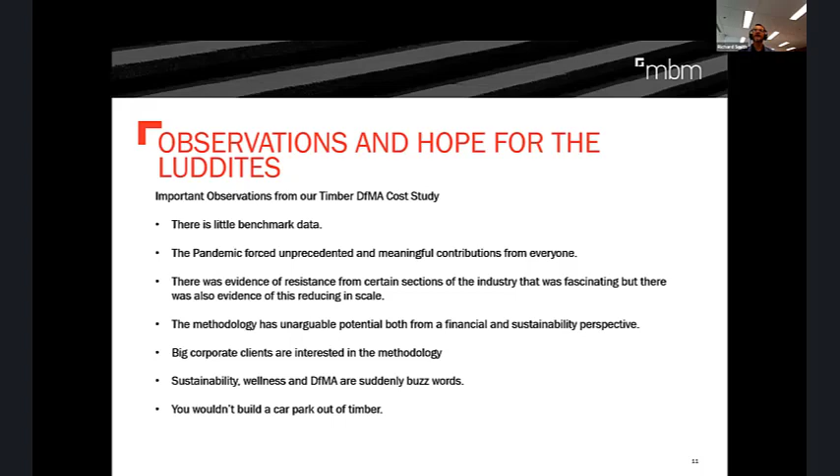There are, of course, some important caveats around the costs that we did, and I didn't want to bore you all here with running through the price of reinforcement and roof sheeting and all the rest of it on this talk today, only because we only have 10 minutes. I'm more than happy to share all the costings we did. I know that schools did produce a DfMA guidelines document that you can access, I believe. If anyone wants to talk to me afterwards, they can. But I've kept the costs on a very broad scale. I'm telling you, it can be cheaper.

Absolutely, it can. The caveat around that cost is that we do need scale, and we do need a guaranteed pipeline, because without it, that momentum stalls. We are, after all, asking an industry to build factories, buy machinery, skilled tradesmen, and take on new ways of thinking for designers. None of it is going to happen unless we can guarantee some work or an adoption en masse of this methodology. I think we need to do that.

I also think we need to educate ourselves a little bit more, and perhaps as an industry invest in research and development, which lends itself to timber school buildings, of course. I think that's really important, that we as an industry spend a little bit more time learning about this stuff, because it really isn't quantum physics. This is really simple stuff, but I do see gaps in knowledge in our industry that need to be fixed. It's also important to acknowledge that this really is the beginning of this new DfMA process. We should avoid catastrophic mistakes. I get that, and like I say, we're not putting men on the moon here.

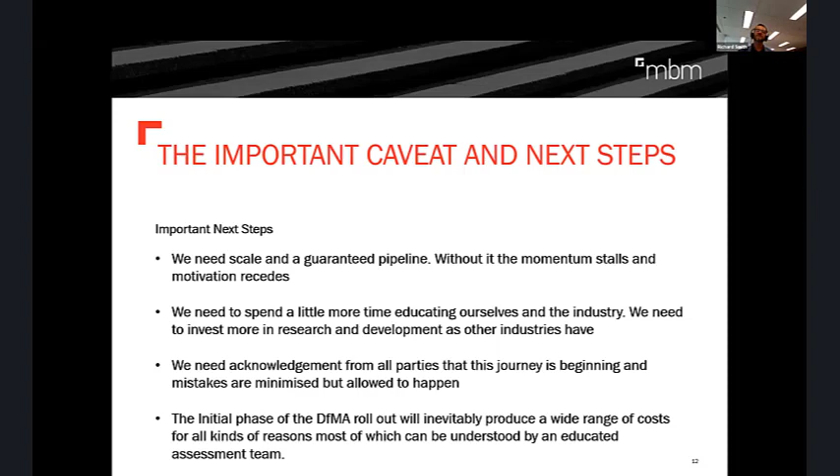So I mean, it is cheaper, it's faster, it's sustainable, it's safe, it's defects free. I think all those things are going to be commercialised eventually. Smarter guys than me will put a dollar on those, add them to the bottom line, and I think they're benefits that are not in any of my costings yet, but they will be. So yeah, it's all good news from my neck of the woods.